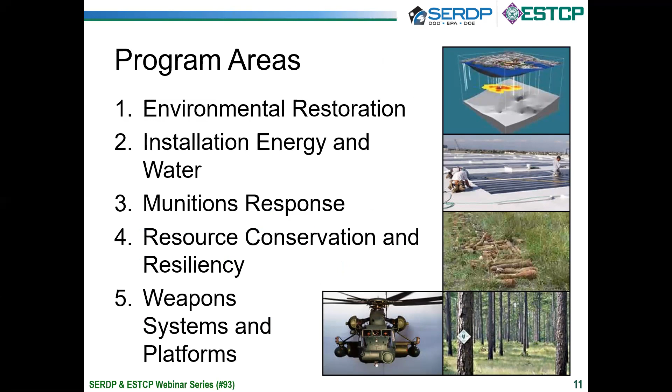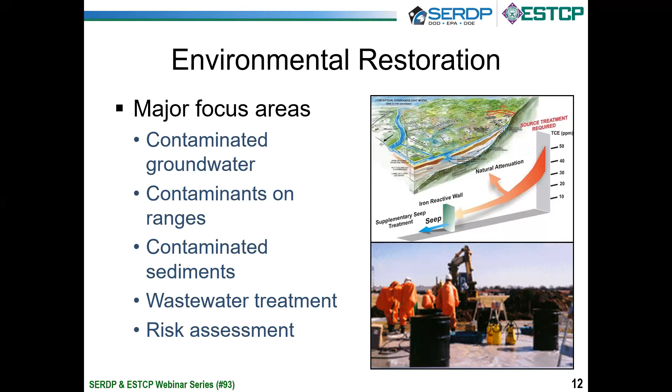There are 4 program areas in SERDP and 5 in ESTCP. The Installation, Energy, and Water program area is only in ESTCP, while the other 4, environmental restoration, munitions response, resource conservation and resiliency, and weapon systems and platforms are SERDP and ESTCP programs managed jointly by a designated program manager. Our webinar today is focusing on research and demonstrations that were conducted under the Environmental Restoration Program area. Environmental restoration has 5 main areas of research: contaminated groundwater, contaminants on DoD testing and training ranges, contaminated sediments, wastewater treatment, and risk assessment.

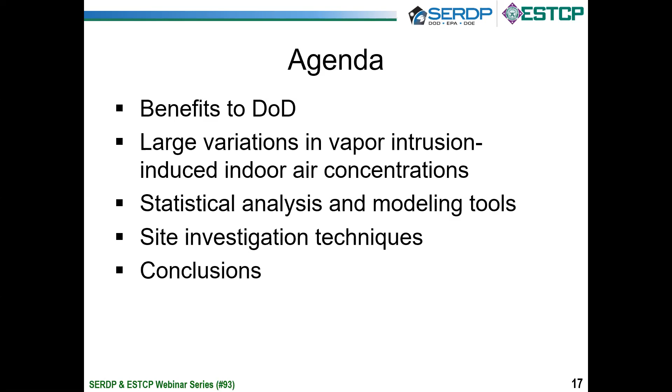In terms of the presentation today, this is a brief outline. I'll cover the benefits to the Department of Defense first, but the main focus is going to be on understanding the vexing problem of transients in vapor intrusion that makes life so hard for regulators and environmental professionals trying to deal with the vapor intrusion problem. I'll introduce various statistical analysis and modeling tools that we use to understand better what is behind these transients and offer some insights into what this implies regarding site investigation techniques.

Now, I suspect that most of the listeners today are familiar with vapor intrusion, but for those who are not familiar with it, vapor intrusion is not a uniquely U.S. problem, and it certainly isn't confined to Department of Defense sites. It involves vaporization of volatile organic chemicals that have been leaked, spilled, or were dumped on the ground, and these vapors travel through the vadose zone, entering structures built atop the contamination.

Like radon, the concern with vapor intrusion is long-term, low-level exposure to these chemicals. Low concentrations do matter, and one of the questions that has to be asked is, what is the right way to characterize the concentrations of concern in vapor intrusion?

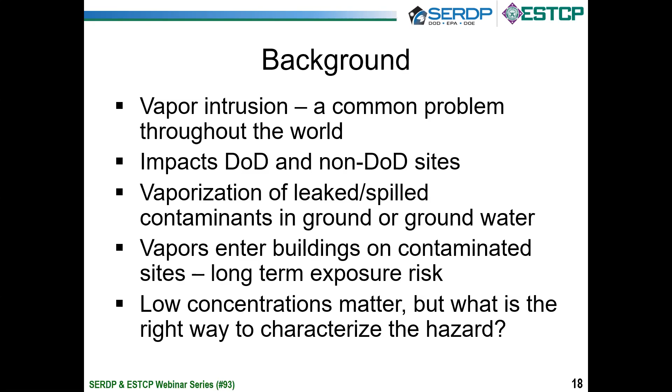In terms of benefits to the Department of Defense, vapor intrusion assessment has historically been very empirical. Measuring concentrations of contaminant vapors at impacted sites, of course, makes sense. But the field results have often been very hard to interpret. And one big problem is that some very careful long-term studies have shown large variability in indoor air contaminant concentrations that have been difficult to explain. These kinds of temporal variations in indoor air concentrations at impacted sites make it very hard for regulators to deal with the problem. What exactly is the relevant exposure?

The point that I'm going to explore here today is that mathematical modeling tools can help shed more light on the problem of transients in vapor intrusion and give better insights into how they can be managed.

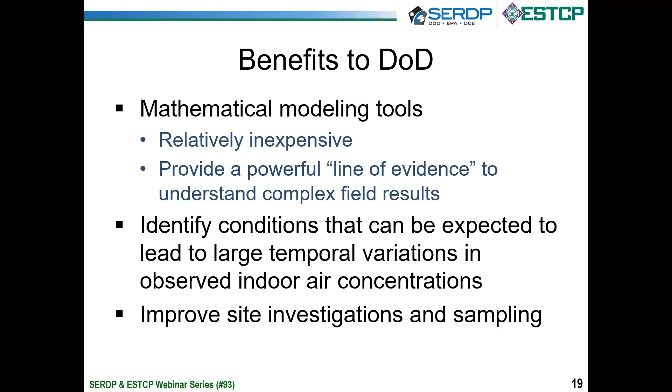Now, the question that came up as we began this work is, these very well studied sites, are they or are they not representative of a broader range of vapor intrusion sites? In other words, is this kind of transient to be expected, or maybe say feared, at all vapor intrusion sites? Empirically, the results from the field have suggested not, but modeling can help tell when it might occur.

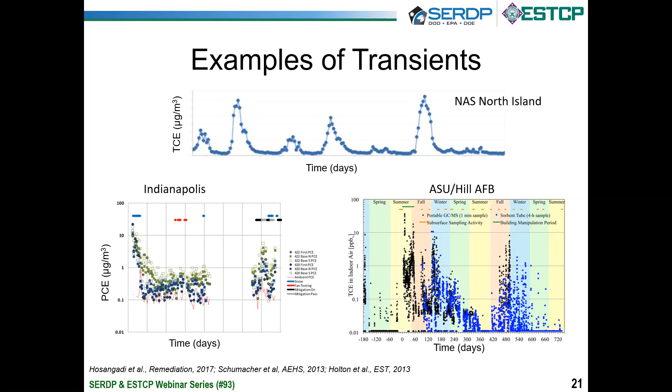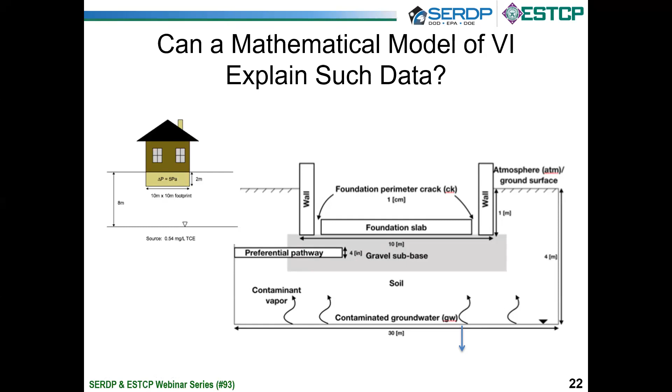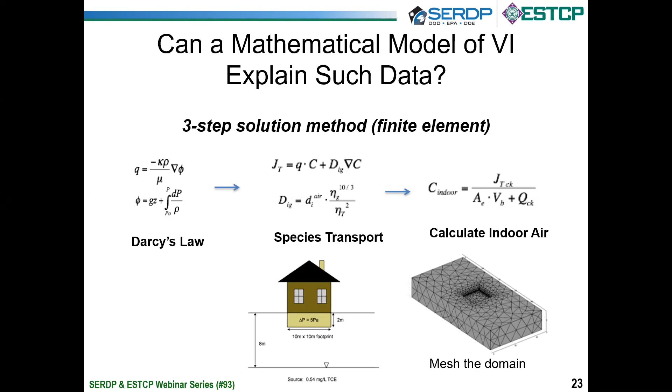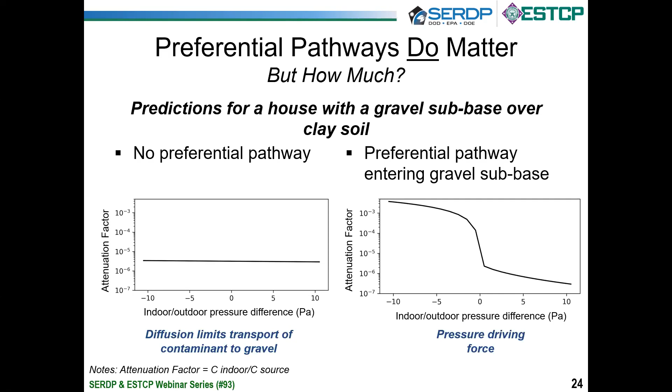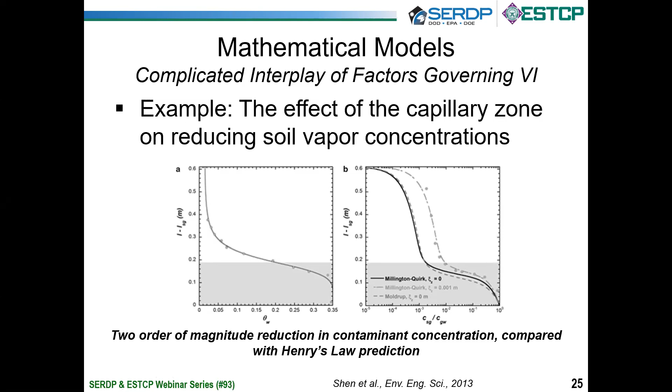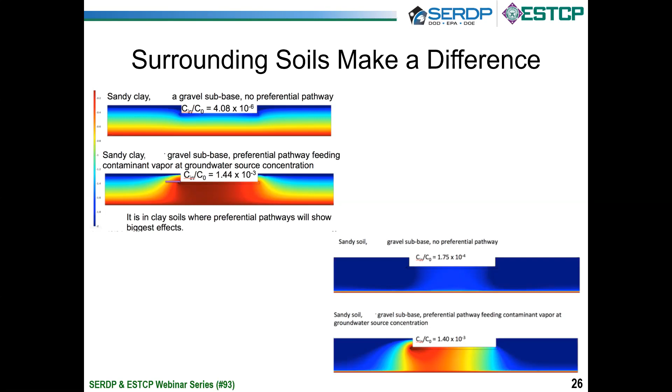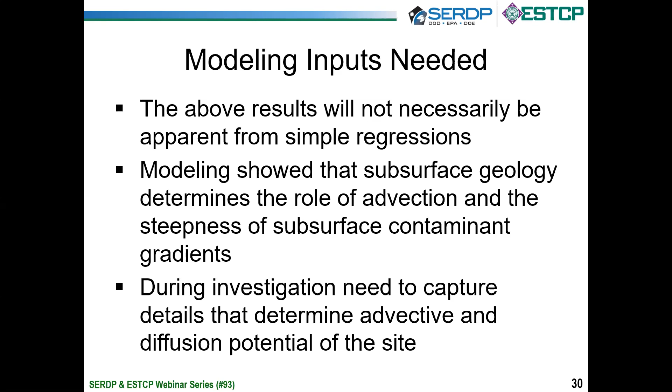So the modeling indicates that there are different kinds of factors that can drive the very large variability observed at different kinds of sites. This says it's very important to correctly obtain the data that are key to prediction of indoor air concentrations. Those key data have to do with the subsurface geology, those things that determine advection and the steepness of subsurface contaminant concentration gradients. During the site investigation, you need to capture these kinds of details that determine these factors.

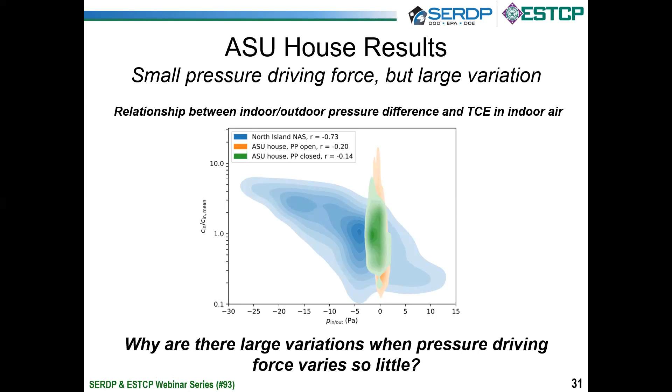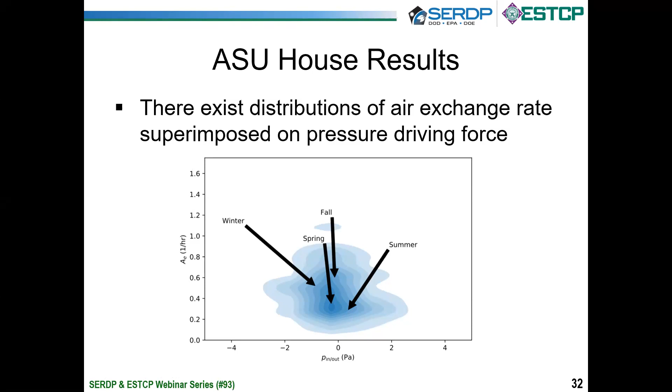What we looked at was the fact that there is actually quite a bit of variation of the air exchange rate together with the variation of indoor-outdoor pressure difference, and that it has seasonality associated with it. If we looked at the time series data from the ASU House, we saw that the winter season was characterized by a higher degree of negative indoor pressure and a higher degree of air exchange than the summer season, which tended to be very nearly pressure neutral or even slightly positive pressure and characterized by a much lower air exchange rate. This imposes on top of a pressure driving force other factors that determine the variability one will see.

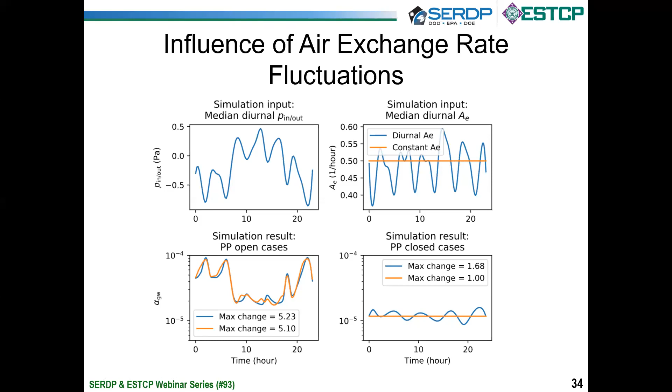This brings us to the implications for sampling of indoor air, in that if one goes in and samples over the course of one day, one shouldn't be expecting to see much more than about a factor of 2 variation in terms of minimum to maximum indoor air concentration.

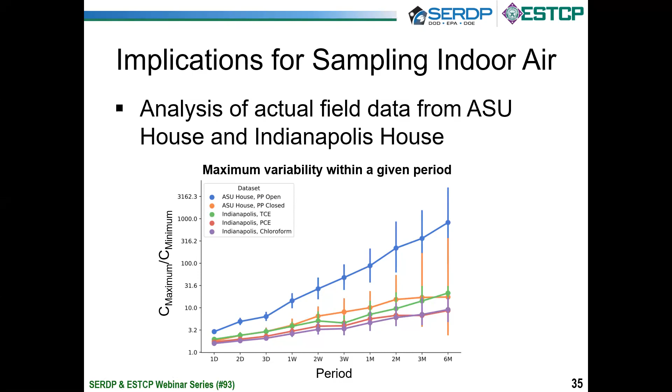However, if one looks over the course of 3 to 6 months, a much larger degree of variation emerges because of the seasonality and the impacts on pressure and air exchange rate. And of course, with the preferential pathway open, an even larger, several orders of magnitude variation can be expected if one is sampling in different seasons. So the implications for sampling indoor air are that a one-day sampling interval is likely to result in less than a 2 to 3 factor difference, and differences of an order of magnitude are typically detected only at longer times.

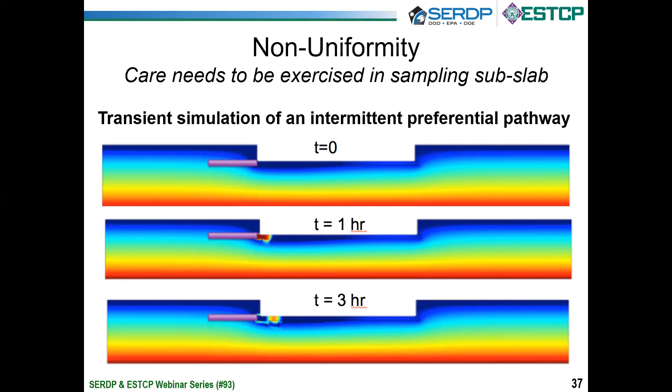I'm just about finished with my discussion. Just showing here that the non-uniformity of the vapor intrusion process in a temporal scale is also predictable using modeling, and it implies the fact that there can be a problem in terms of doing subslab sampling. What time do you actually take a sample in order to determine what the subslab concentration might be?

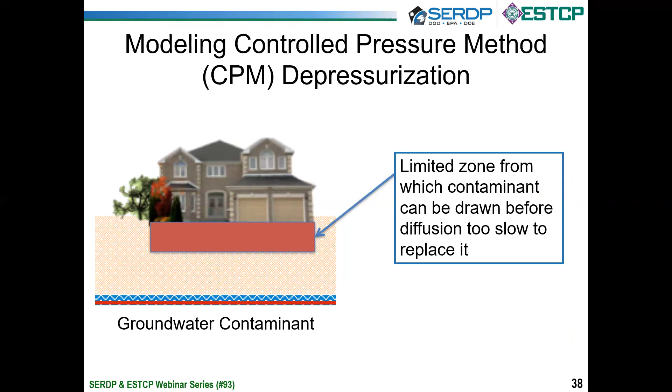The final point I'm going to close with is looking at the modeling of controlled pressure method as a characterization tool for vapor intrusion. There's a limited zone from which contaminant can be drawn in a scenario where the house is deliberately depressurized to create a worst possible case scenario for vapor intrusion. This is a commonly used technique. We've modeled it, and I'm not going to focus on the details of that equation.

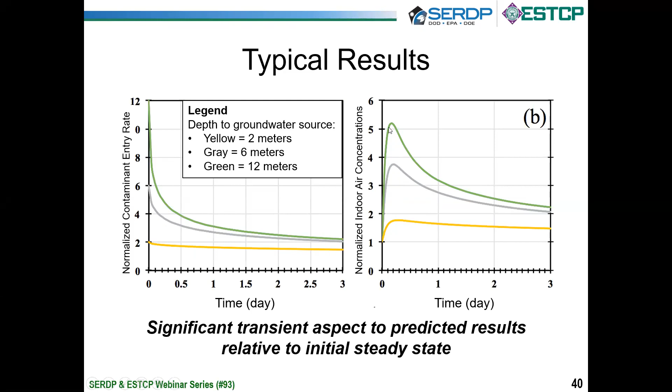I'm out of time, but the warning from this modeling is, let's focus on the right-hand figure here. The normalized indoor air concentration, by virtue of the fact that one is looking at a transient in the subsurface in addition to in the house, is going to give very different kinds of results in terms of indoor air concentration, depending upon when you begin sampling, how many hours after the controlled pressure method is initiated. Again, modeling very nicely predicts this.

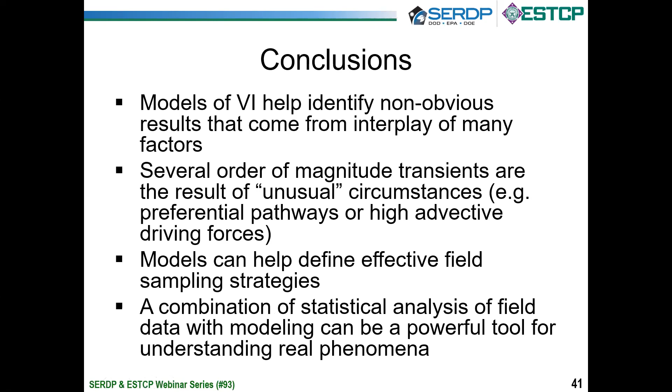So let me close to say that I hope I've given a little bit of a flavor that models of vapor intrusion can help identify non-obvious results that come from the interplay of a lot of different factors in vapor intrusion. Order of magnitude transients are the result of unusual circumstances, preferential pathways, or highly advective driving forces. They are not expected at most what you might call ordinary vapor intrusion sites. The modeling can help define effective field sampling strategies in terms of how often one takes samples. And it's this combination of statistical analysis with modeling that is a powerful tool for understanding the real field results.

So with that, I apologize for running over a bit, but I'll be happy to take some questions.

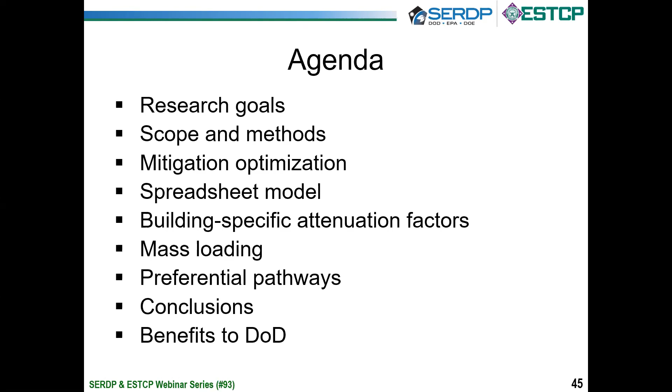For example, the building-specific attenuation factor is something we have now, a mathematical model to calculate. I'm mentioning that in response to one of the questions that was asked a moment ago. That spreadsheet is something that will be posted to the ESTCP website, so it will be available for free. So without further ado, I'll carry on to try to give a framework for why we're doing this research.

In conducting mitigation at a number of sites, we came to the realization that some of the radon mitigation contractors we were subcontracting to help get the work done cost effectively had different approaches than what we had previously experienced in soil vapor extraction and other technologies that were pretty close to one another, but the approaches were quite different, which got us to thinking about why exactly is that.

Usually you're making measurements with 2 or 3 different radial distances, and depending on which distances you get, you might have a different estimate of the slope of the line of vacuum versus distance. That would give you two different estimates of the radius of influence. It could be quite significantly different. This was not very satisfactory to us, so we thought, well, let's see if we can get into this in

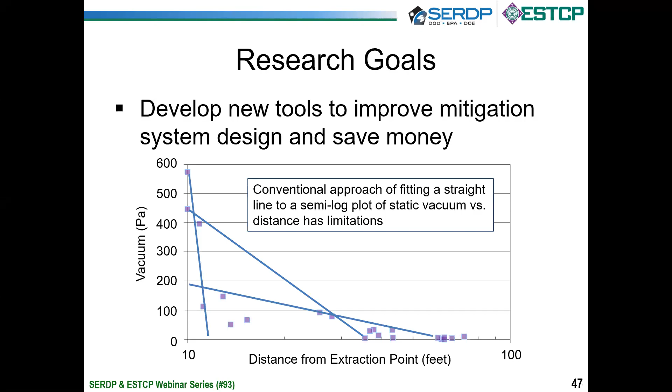a bit better detail. Then with the conventional design, you also are comparing to some target vacuum. And usually these are specified in guidance documents, but the more we made measurements across the floor slab of real buildings, the more we saw that they weren't the same from building to building. In many cases, it's almost a unique signature, unless it's a flat line. There are some buildings that are so leaky that they can never really generate positive or negative pressure, no matter how much air you move in or out of them.

But for most buildings, especially ones with ventilation systems that either extract air or blow air into the building, you'll see some kind of an effect of that that's either balanced or not balanced. It might be static or cyclic. And getting to understand this is actually quite important because, as Eric mentioned earlier, this is an important driving force. Regulatory guidance documents might not say you have to measure this, but I'm saying it, you have to measure this. This is an important parameter.

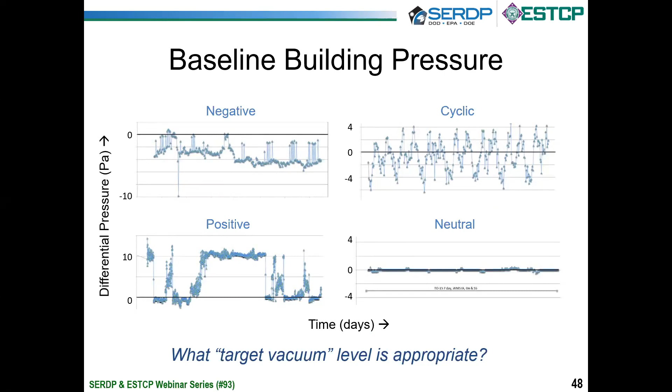So our conceptualization is that we've got a 2-layer system. There's a concrete floor slab over top of either native soil or compacted granular fill material. Most building codes now specify that fill material should be placed below floor slabs, so more recent construction tends to have a gravel layer or granular fill layer. But older construction sometimes doesn't. But most often there's something more permeable below the slab than concrete.

So in this conceptualization, we've got a conductivity and a thickness for each of the 2 layers. K is conductivity and B is thickness. Flow is going to be mostly horizontal through the layer below the slab, and then there's some vertical downward flow across the slab. That's the whole goal of these systems, is to prevent upward flow by creating downward flow.

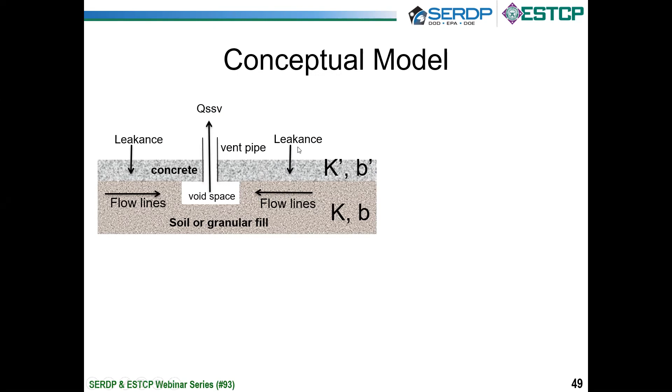Now, this conceptualization is really no different than the Hantush-Jacob leaky aquifer model of 1955, which was designed for groundwater assessment, where you have an aquifer that has a pumping well screened in it and you're extracting water from that well. The drawdown cone extends outwards until the amount of water leaking downward through a leaky aquitard equals the amount of water being extracted, and then your drawdown cone stabilizes and it doesn't spread out any further.

So in our view, this is 2 different fluids, air and water, but otherwise both looking at a 2-layer system, where the lower system is the more permeable one, the upper system is the less permeable one. Horizontal flow occurs in the deeper one, and downward flow occurs across the shallower one.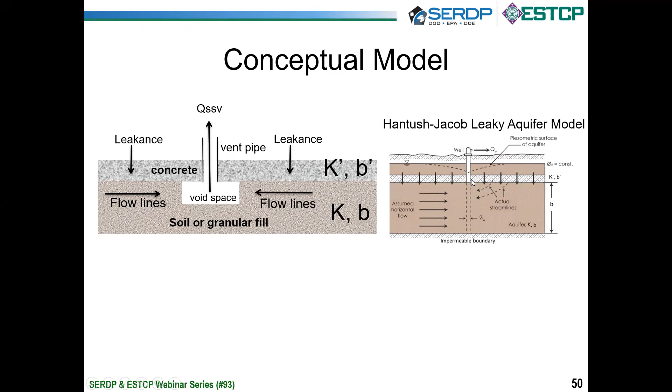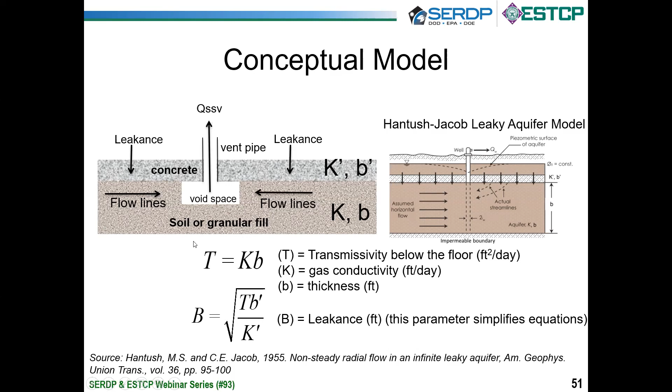So with that conceptualization, there are 2 key parameters: the transmissivity of the material below the floor, which is just the gas conductivity times the thickness. And then this parameter that Hantush and Jacob defined as leakance, which is just a combination of parameters that ends up simplifying later equations, but it basically relates to the vertical permeability of the floor slab. So the horizontal permeability of the stuff below and the vertical permeability above are the 2 main factors here.

With those two parameters, you can plug them into a series of equations that give you a lot of useful information. For example, you can look at vacuum as a function of distance, velocity as a function of distance, travel time as a function of distance, the proportion of flow originating below the floor versus originating from leakage through above as a function of radial distance.

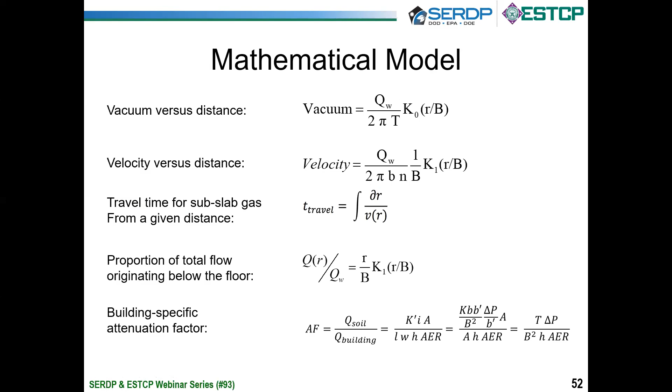And all of those four were available from Hantush, but we recently also derived an equation for the building-specific attenuation factor. So basically, do a pump test, measure the T and B, and you get all this useful information. That's a pretty fun thing to have.

Our scope of work included 4 buildings of different sizes and dimensions, orientations. Building 200 at the Raritan Arsenal, single story, a couple thousand square foot, more or less like a bungalow. Vandenberg Air Force Base, building 11193, a former dry cleaner, so we have a stout tetrachloroethylene source beneath the building, single story slab on grade, not heavily insulated, fairly leaky building.

Sun Devil Manor, which was described earlier in Eric's talk, near Hill Air Force Base, extensively studied by Arizona State University, and another building at Raritan that was much larger, so a big commercial style building.

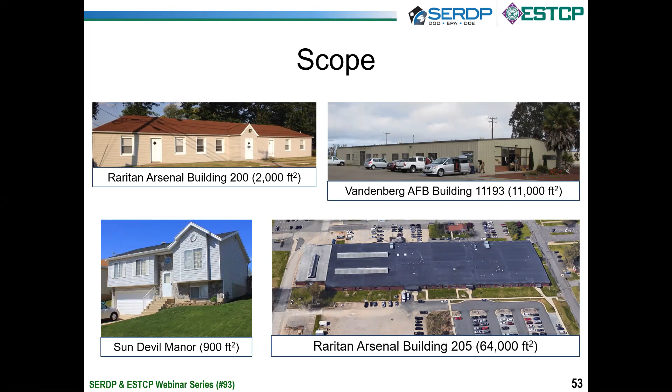And our methods are not much different than a soil vapor extraction pilot test. We've got a fan. Usually it's simpler and less expensive to purchase a shop vac for a particular project and give it away to somebody at the end than it is even to ship a decent sized blower back and forth to a site. So we often use a shop vac as a driver.

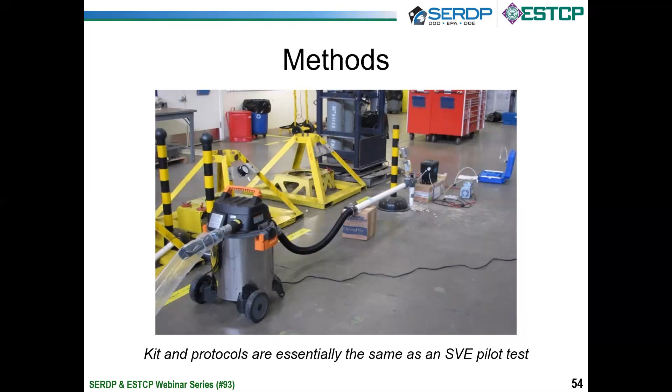It goes to a suction point below the ground through a straight piece of tubing that gives us essentially as close as we can to laminar flow that we can measure velocity in. We've got sample ports for measuring vacuum and collecting Tedlar bag samples for field screening parameters, PID, landfill gas meter, and a connection for Summa canister sampling with a discharge pipe that takes us to the source. The tests usually run for anywhere from 15 minutes to an hour. During that time, we collect data of a number of different types.

Vacuum can be measured over time using a logger, digital micromanometer. And you can do that both in the time before you start applying suction to get the baseline fluctuations, but you can also make measurements over time after you start suction. Usually things stabilize pretty quickly, and then when you turn the fan off, the vacuum dissipates fairly quickly. But the analysis of that transient drawdown and recovery data is similar to a groundwater pumping test, and that data can be analyzed independently of the vacuum versus distance data.

So we put probes at different radial distances so that we can measure the profile of vacuum versus distance as well. Vacuum versus time and vacuum versus distance are two independent data sets, but they're both useful because they both relate back to the leakance and transmissivity parameters.

We measure velocity using helium. You can do helium tracer testing in two different ways. You can put a little pulse of helium into a probe. It'll migrate towards your suction point, and you can monitor the arrival at the suction point with a helium meter. The helium meter is like $100 a day rental, and helium, you can get even party supply store helium. It doesn't need to be ultra pure. And just a balloon full of helium is usually enough to do this kind of test.

Another type of helium test is to reverse the fan and blow air into the subsurface, adding some helium to that at a small percentage, and then watching as it migrates underneath and arrives at the various probes at different distances. We're also collecting samples from the vent pipe and measuring the velocity in the vent pipe so that we can get a measurement of the mass per unit time that's being extracted.

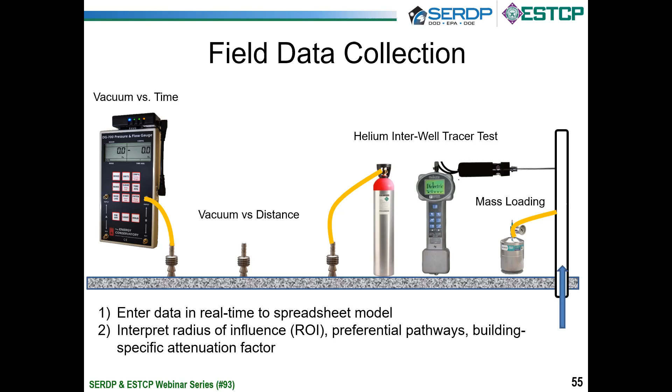Most of these lines of evidence take very little time to implement in the field, and once you're in the field anyway, don't add very much to the cost. So they're quick and easy and pretty painless to implement, not expensive or time consuming, and so they provide a lot of extra useful information.

Looking at the vacuum versus time data, this is a plot straight out of AQTESOLV, which people have been using for groundwater pump test analysis for years. You just need to do a correction to express your gas pressure in feet of air head, and then you can import it into AQTESOLV and fit to the Hantush-Jacob model. In this case, what we're showing here is a blue line that is the mathematical model, and these little squares are the measured data points.

And if you look how closely those two match, it's pretty encouraging. They would not match well if the real world conditions were very different from the model assumptions. The fact that they do match so well is quite encouraging. We've done hundreds of these tests, and we've found this kind of a fit is common, like 95 to 98% of the time you'll get an amazing fit like this, which is quite encouraging.

The times when you don't get a fit like this are when your response is so fast that even the data logger can't keep up, or the rate at which it takes the fan to spin up to speed is slow relative to the assumption of an instantaneous start, or where there's preferential pathways below the building floor. So this analysis is one way to get a hint at preferential pathways.

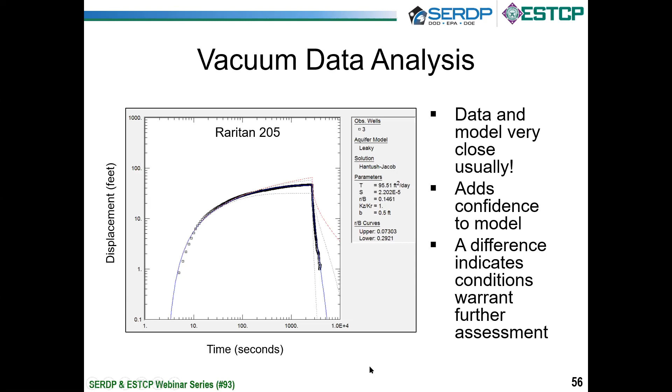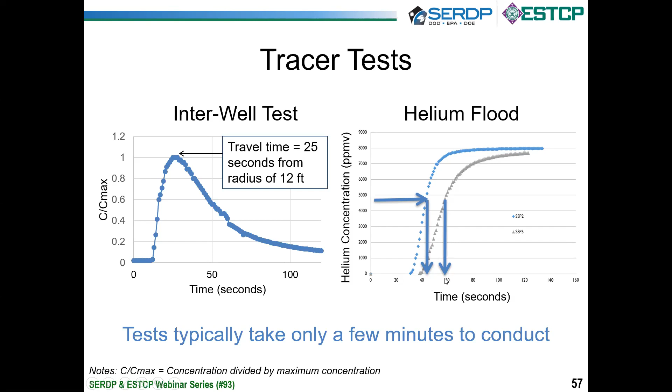It's not expensive. On the right is the result for helium flood, and because the helium is added continuously as opposed to just a slug of helium, the concentration starts off at a low level, goes up to a level and stabilizes at whatever level you're injecting it at. And the arrival time is the time it takes to get halfway there. So in this case, for these two, about 45 and about 60 seconds. Again, not time consuming and therefore not expensive.

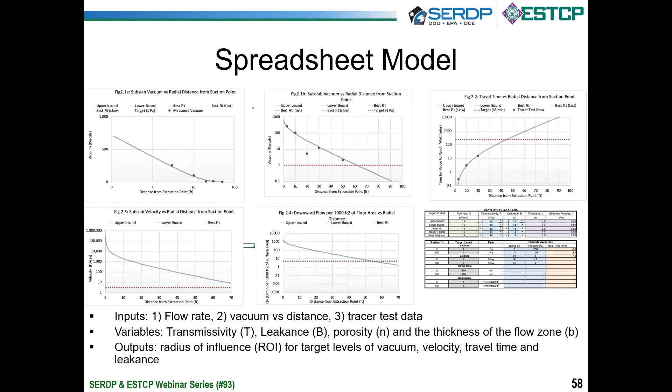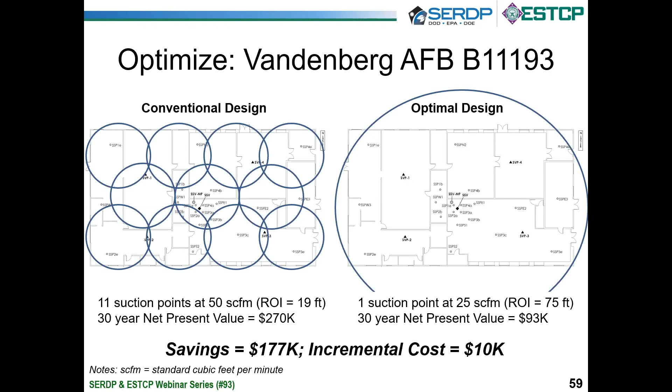So the result is a lower capital cost, a lower operation and maintenance cost. The total net present value estimates differ by almost a couple $100,000 with an incremental cost of only about $10,000. So the cost effectiveness of this technology, I think, is pretty clearly demonstrated.

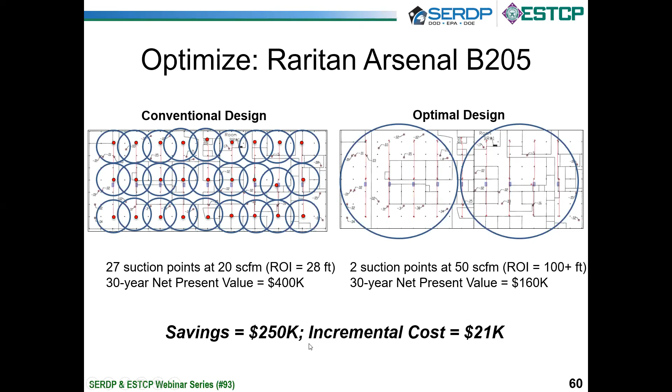I mentioned earlier that we developed a calculation for the building specific attenuation factor. Again, it depends on the transmissivity and the leakance. So once you do the pump test and calibrate the model, then you get these two parameters. The delta P is that differential pressure across the floor slab, which can be measured with the data logger, and that's a relatively affordable piece of equipment, and it does all the work.

The height of the building you can simply measure, and the air exchange rate is something you could either take from the literature, or if you have an incentive in doing something more detailed, you could do a tracer test to work out the air exchange rate. You could also get the air exchange rate from a blower door test, which I'll talk about in a minute.

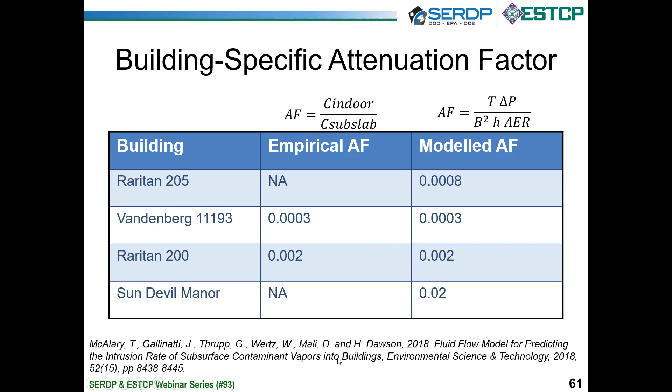We didn't have empirical attenuation factors at Raritan 205 because the indoor air concentrations were really not measurable. And at Sun Devil Manor, it's hard to come up with one attenuation factor because there's a pretty broad range of concentrations measured there. But for the other two buildings, calculated attenuation factors matched up within one significant digit of those measured by measuring subslab and indoor air concentration data. So this is documented in an EST article if you want more details on that.

That attenuation factor can be used to develop building-specific subslab screening levels. This is particularly interesting for the DoD because many of their buildings are designed in such a way that they're not going to have very high attenuation factors that would result in very low screening levels.

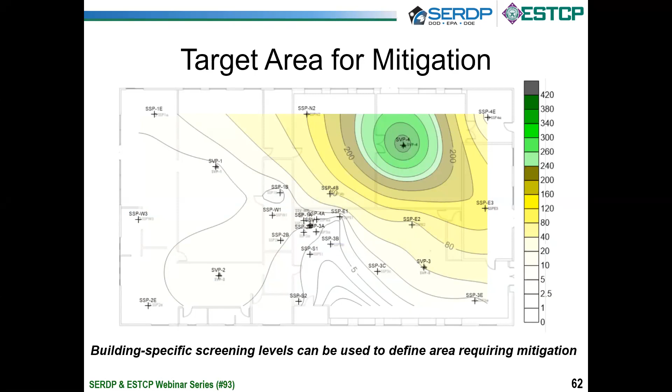And so you could potentially have buildings where there was a release off in one area and you don't need to mitigate the whole building or down to very low screening levels in order to achieve protectiveness. And then you might end up just having a target treatment area instead. And that could result in more affordable and more practical and easily implementable mitigation systems.

I want to talk a little bit about mass loading. Vapor intrusion occurs usually because there's some flux upwards from the subsurface towards the building, often characterized by a one-dimensional diffusion equation. But you can measure that flux in a couple of different ways. You can extract gas from below the building, and the flow rate that you're extracting at times the concentration that you're pulling out gives you a mass per unit time.

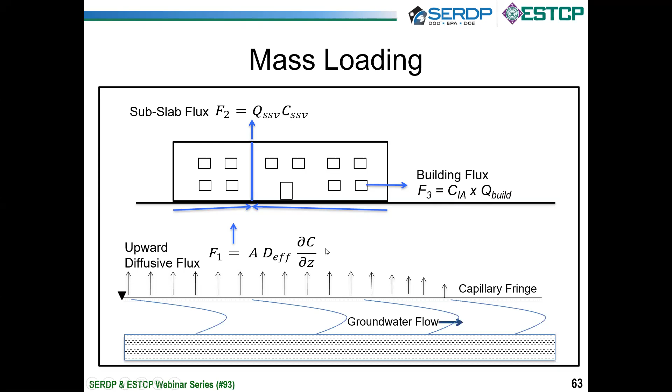You can also calculate a threshold value that would be required to sustain indoor air concentrations at a concentration of concern. For example, the big building like building 205 at Raritan would require a few grams per day of trichloroethylene to pose a concern. And no matter how hard we sucked on the building or from below the building, we couldn't get anywhere near that much mass. This provides you with a line of evidence to argue that a system probably isn't even needed.

We continue to operate a system in an abundance of caution, and also possibly because the tenant of the building currently is the United States Environmental Protection Agency. And we'd want to make sure that we're protective for them.

The other buildings showed mass removal rates that were much higher than the threshold mass, which means the system is justified. And the amount that we're removing from the subslab system was generally higher than the amount that we could get by exerting a vacuum on the building, indicating that our systems are extracting as much or more mass than they need to. And that's something that helps you assert that they are protective. And another independent line of evidence that adds to the flow and vacuum type measurements that we had previously.

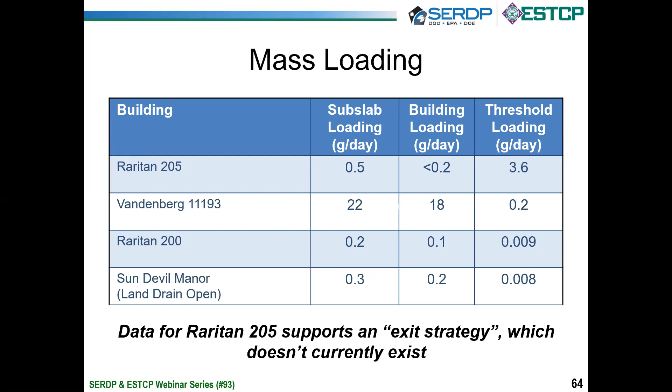Another interesting side benefit of this technology is the ability to identify the presence and possibly location of preferential pathways, which up until this point has been elusive. If you measure vacuum as a function of distance and it matches right up with the model, then the two-layer system is reasonable to assume applies at the particular site.

Where there's a preferential pathway, air will flow into the subsurface more easily, and where air flows more easily, vacuum dissipates more easily. So where you see vacuum that's lower than the rest of the trend, that gives you a hint, and that hint should not be ignored. There has to be some form of flow towards that.

Now, that could be either a floor crack that's providing flow from indoor air, or it could be a subsurface drain that's providing air from a lateral distance, like the land drain at Sun Devil Manor. This doesn't distinguish between the two, but it does at least give you a hint that there's something to look for.

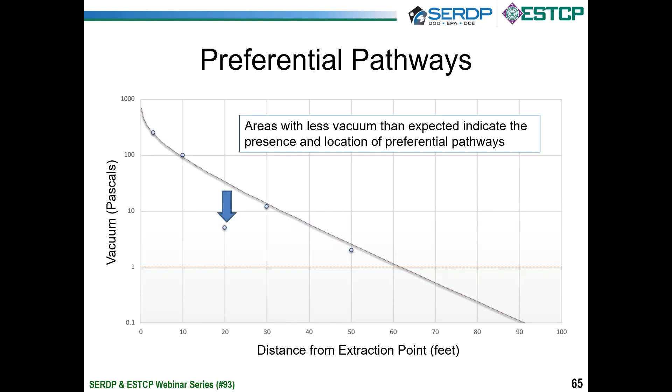And we noticed also that there are times when you might have a low vacuum level at a certain spot, but even further away have a greater level of vacuum. So these effects may be somewhat localized. And how localized they are may relate back to whether it's a leak across the floor or whether it's a subsurface pipe. Perhaps a leak across the floor has a more localized effect than a subsurface pipe. This is still early days, and we'll learn more about that as time progresses.

So we want to just try to wrap up by saying that mitigation primarily in the past, static vacuum and indoor air sampling have been the two primary mechanisms for evaluating and designing systems. But now looking at the baseline differential pressure, static vacuum in the near field as well as the far field helps us calibrate those plots a little better.

Doing the transient vacuum testing is really just a matter of turning the fan off, letting the vacuum dissipate, turning it back on, letting it reestablish. Usually that takes only a few minutes, but it gives you another line of evidence. The helium tracer testing is either blow a puff of helium into a probe near the extraction point or reverse the fan and blow helium into the extraction point. Either of those tests can also be pretty quick and not that challenging in terms of their implementation.

Then pop the data into a spreadsheet model. It's pretty quick, it's pretty easy, it's pretty user-friendly, and you can get a much better sense of what your radius of influence would be, particularly for those buildings where you have a large enough one to require multiple suction points. You could even use it to select a fan by adjusting the Q value down to whatever level is sufficient if all you need is a single suction point.

And then vent pipe sampling just to get the mass removal rate. Again, that's just hook up a summa canister and collect a sample. Or if you wanted a longer term average, you could drop a passive sampler in there, as long as it's got a windscreen, because the velocity in there is going to be pretty high.

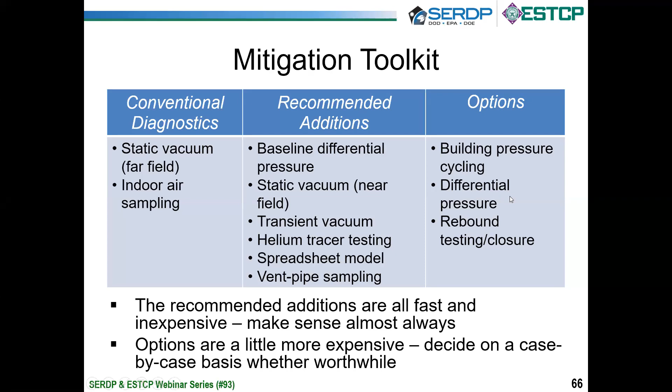I've just divided these into two different categories of recommended and optional, just because the recommended ones don't really add much to your cost, and they're probably worth doing almost all the time. The optional ones add a bit more to the cost and may or may not be justified, depending on a site-specific or case-by-case basis.

So in conclusion, I'd just like to say we believe that the two-layer model does a pretty good job of matching field data. Where it does, it gives you confidence that you're actually looking at a system that more or less matches the model assumptions, and where it doesn't, it gives you hints of preferential pathways, which in itself is useful. It gives you a little more confidence in your estimates of radius of influence because you'll be able to look at it from different lines of evidence.

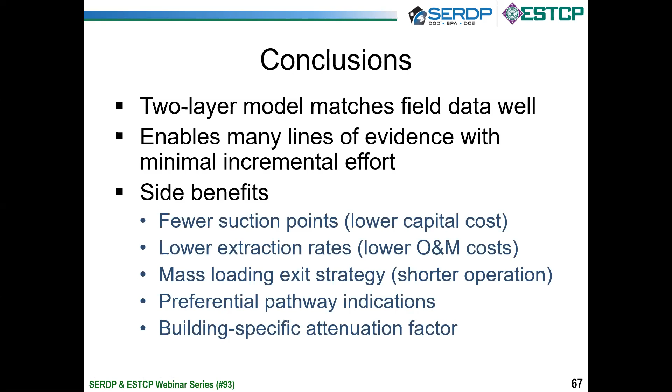And I'm not sure whether these are side benefits or just benefits. You may end up with fewer suction points, lower extraction rates, both of which will lower your costs. The mass loading gives you a potential exit strategy where it's appropriate. Having indications of where and whether you might have preferential pathways is useful, and having a building-specific attenuation factor is also useful, particularly for those buildings that are not very susceptible to vapor intrusion, and you have low-level concentrations below them that are above generic screening levels, but not high enough to really pose a problem.

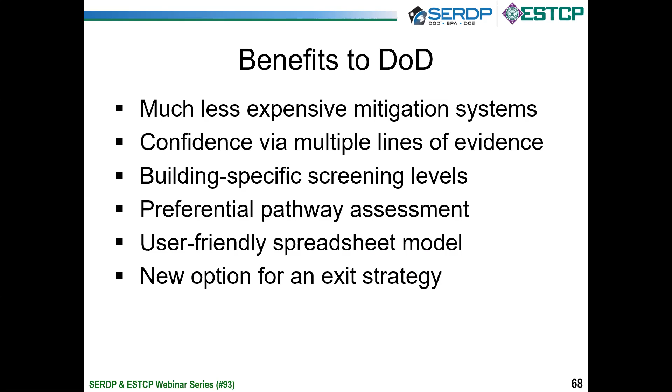So the benefits to the Department of Defense are pretty similar to those I just listed. The DoD has a lot of buildings, and the total amount of costs that might be incurred in invoking mitigation at all of them could really add up. But if you can do a small amount of testing to save a lot of money, then there's potentially a lot of money to be saved. And this provides additional confidence and the other things that I just mentioned. This is implemented through a user-friendly spreadsheet model, so it should be pretty easy for people to pick up.